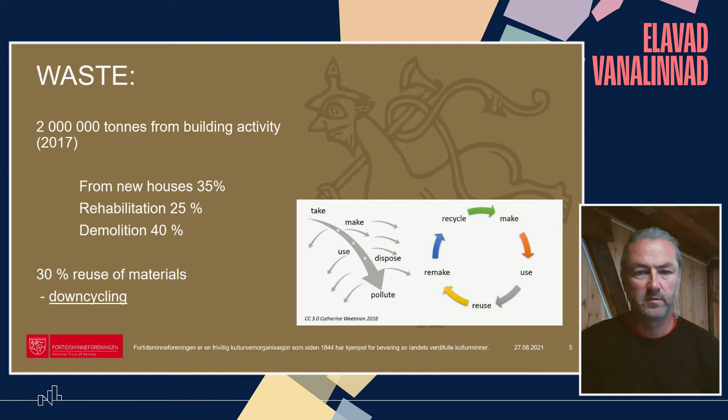First, a few lines about circular economy. In Norway, about 2 million tons of waste are created each year in the buildings business, and 35% of this is from building new houses - that's materials made but never used and thrown away. About 25% is from rehabilitation of buildings, and 40% is demolition. And in Norway right now we have about 30% reuse of materials.

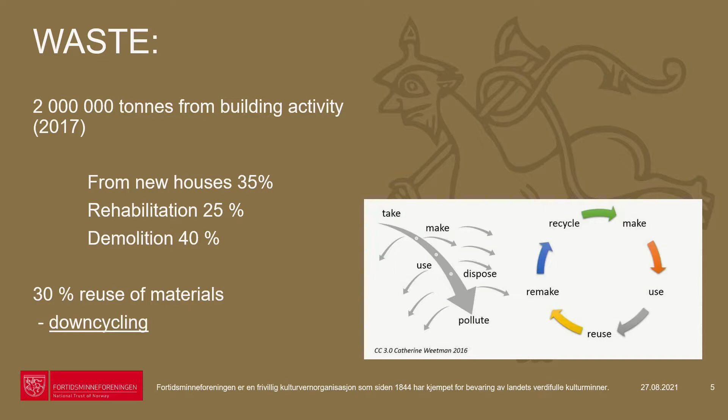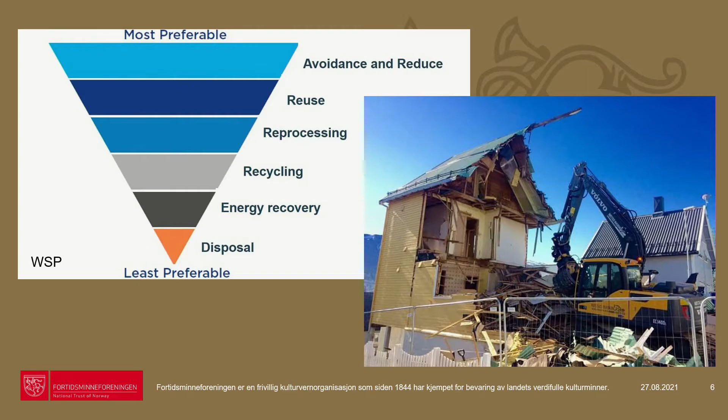But as I'll show you in the next slide, this is actually not a good circular practice - it's downcycling. It's very important in the circular economy to use things as long as possible, and this means that you cannot demolish houses and use the bricks and so on. That's not good circular economy, it's the least preferable practice. We should use the houses where they stand.

And actually, my organization and everybody involved with heritage has been working with circular economy for quite a long time, because we strive to repair houses, reuse materials, and that's sort of an ideal for this circular society to come. A lot of the materials used are eco-friendly, degradable, maintainable, and they have a quite low eco impact.

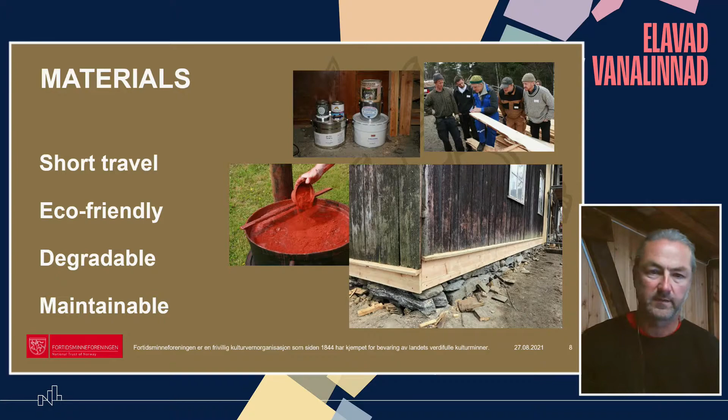Another important aspect, as I was mentioning at the start, is people that actually have the skills and the knowledge to repair houses and make them last longer. These are 4 young crafters working with traditional buildings in Norway, and they stand for a kind of culture that wants to repair things, and that's extremely important.

This means that if we want to make the historic towns, the heritage, contribute in the circular economy, it's very important to educate good crafters to work with these houses, especially in traditional crafts, because they know how to fix houses in the best ways and with the best materials.

The heritage business also has a culture for repairment, and that's a culture for sustainability, because among the ideals is that things should last a long time. We're not craving for new stuff, not craving for new stuff showing up every week. It's like if it's old, if it shows it's old, it's very good, and that's the base of a culture that takes care of things and makes them last longer.

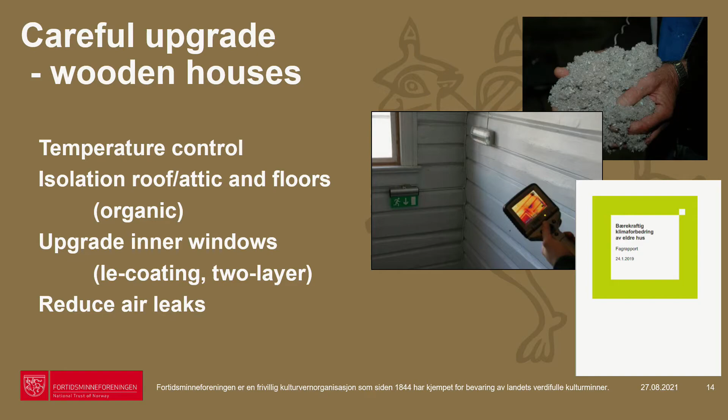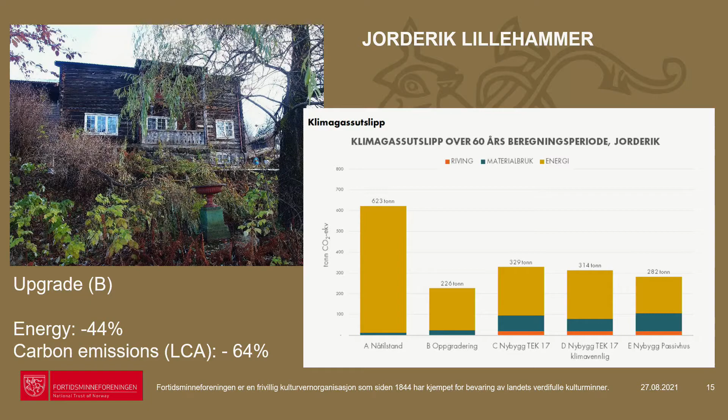What we've done to the house is some small and medium upgrades, that's alternative B. We followed the recommendations I showed you earlier. The result is a 44% loss in energy use and a 64% loss in carbon emissions over a period of 60 years.

If we instead were to tear down this house and build a new one according to Norwegian standards right now, we will have an emission level about 50% higher than the upgrade alternative. The same goes if we build with climate-friendly materials, and also if we build what's called in Norway a passive house, meaning a house that produces its own energy.

As you can see, the far best alternative in the climate calculations is the one with the upgrade. This means that old houses can really make the difference.

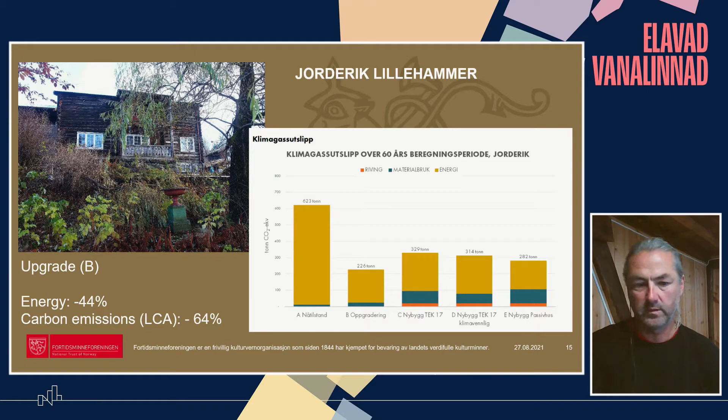We have several places around Norway, advisory centers that work to promote crafts and good technical solutions for old houses. A lot of this advice tends to favor using traditional materials and traditional repair techniques, because that's very often the best way to handle the heritage, but it's also the best climate alternative, and it is circular economy applied to a city or buildings.

We are now trying to use these several places around Norway, and crafters are a central point in this strategy, to educate new traditional crafters who can repair these buildings the way they were repaired, with the eco-friendly materials they were once built with.